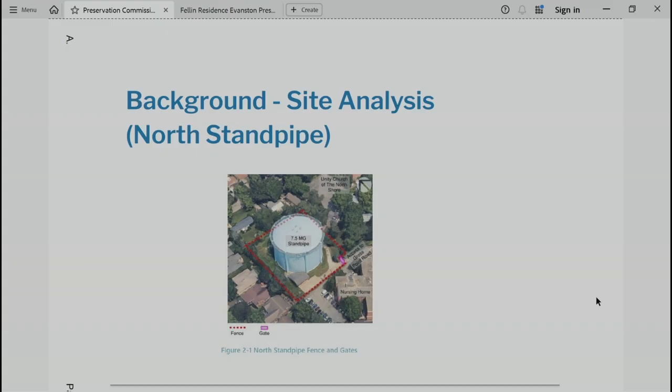We're going to replace it with something that looks like that, a palisade style fence. We're proposing some privacy slats along the top, on the north and west portions of the fence. So it will look like the picture on the right.

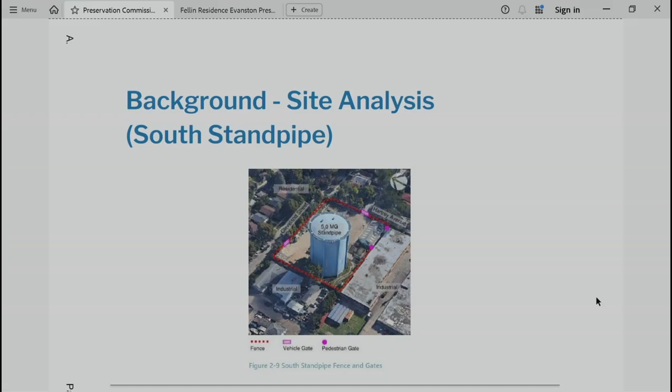This is the south standpipe location, around Cleveland and Hartrey on the south side of Evanston. It's a 5 million gallon standpipe, and we're doing the same thing there. That red dotted area, we'll be replacing the fencing and the gates at this location. This is what's there existing: a typical chain link fence with some privacy slats.

These are just a couple pictures of the gates, the west gate and the north gate. All of that is proposed to be replaced, again with the same palisade style fencing, and there will be some privacy slats on certain portions of the fence. This one here is more to block lights and dust.

We get complaints from the community around that area because we're in and out of that sometimes even 3 in the morning, all hours of the day and night. If there's a water main break or something, we have to access this location. So we're going to add that just to help with dust control and lights and things of that nature.

This is the water plant location, which I know is a landmark. The green fencing or green lines indicate where the fencing is being proposed and replaced. The section starts on Lincoln Street, goes towards Sheridan Road, and wraps around to the front of the water plant. That's the conceptual design we're proposing.

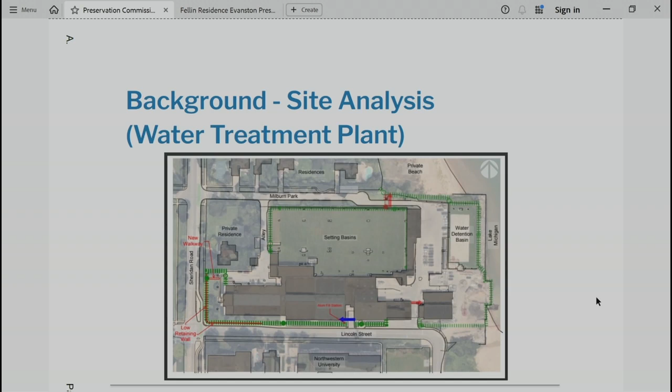Currently, there's no fencing there. The rest of the fencing shown is existing, and we're just replacing it. But that fencing along Lincoln going up towards Sheridan Road, that would be new.

This is the typical north fence. It has some privacy slats, chain link. The east fence facing the lake—currently at the top, that's the top of one of our settling basins. That's the existing palisade style fence, and it'll look similar to that.

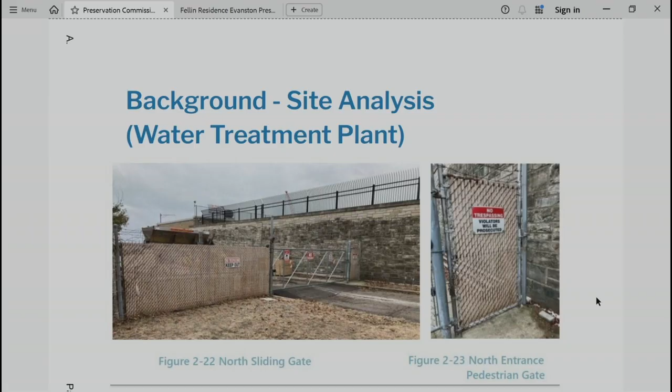We'll replace the gate there at the lower elevation, and the pedestrian gate will be replaced as well. Chain link with barbed wire is the existing condition. The south entrance along Lincoln Street, all of that's going to get replaced.

Again, palisade style fencing. So it'll be decorative, it'll look a lot better, and it'll be more secure. Certain parts of the fencing and gates will be impact resistant as well. I won't point that out specifically, but that'll be something designed and incorporated into this project, not just at the water plant, but at the other two locations as well.

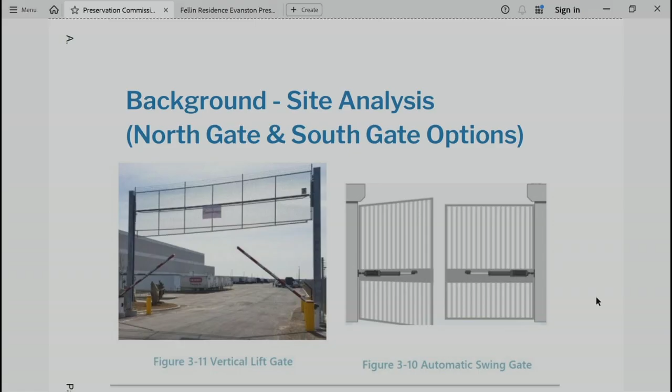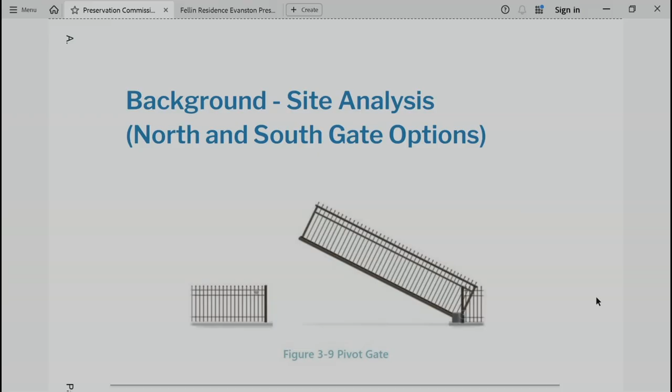And for the gates, we're looking at 3 different styles: a vertical lift gate, a swing gate and a pivot gate. Again, all of them will be decorative style just to enhance the appearance of that location.

The design was conceptual for 9 months, and that has been completed. We're looking at a total duration for design and construction of the fence of 21 months. We're currently at the 30% design stage. 60% is anticipated to be completed in February 2026, and the current contract end date is July 9th, 2027.

So we wanted to bring this while we were only at the 30% phase and get you all's opinions about it. Any questions?

Sorry, what's the height of the new fence versus the old fence? Is it comparable? The new fence at the water plant will be 8 feet, and at the north standpipe that will also be 8 feet. Right now we're looking at the south standpipe location to see if we can potentially get a variance to make

that one 10 to 12 feet to help with the dust as well as the lights in that area. So 8 feet is what it is today? The chain link is 8? The chain link is actually 7 feet. Okay, we're going to raise it up to 8 feet at the water plant and at the north standpipe.

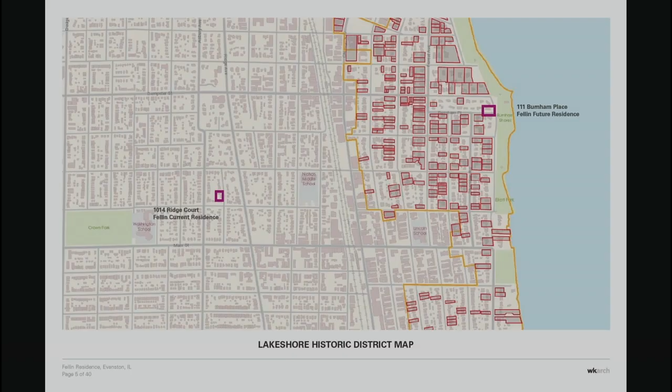So this is our reading of the Lakeshore district. We looked through that report. We've looked at every one of the contributing properties as well as the landmark properties. And on this map, we are also seeing where the Fellins currently live and the parcel that they have purchased.

Within the old Daniel Burnham parcel, we have looked through the standards, and I'll go through some of this more, particularly, Carl, for the criteria for demolition prior to getting into the design. But I think it would be important for us to walk you through the history of the parcel through Sanborn maps, and then to introduce some of the images that are recently found at the Art Institute.

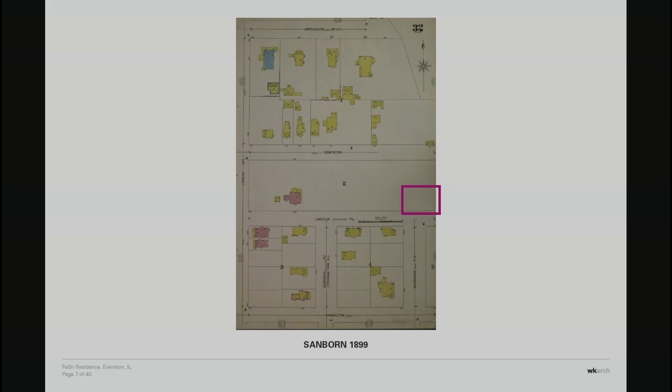So the Sanborn map of 1899 describes the site in that red square. There's nothing there. There's no wall there. And there is, to the left of that, the Burnham estate, which was the project, or the building, that Daniel Burnham bought, from our understanding. And they owned that entire parcel from Dempster down to what became Burnham Place.

So this is really the history. The bottom is 1899, so we could presume that there was a house to the left that was the Burnhams'. The Burnhams had that broad estate. And somewhere, in these drawings done prior to the information we will introduce tonight, a retaining wall bounded Burnham Place, the eastern facade, as well as the north along Devon, or Dempster.

That was presuming that there was going to be a relocation of a roadway, as we understand it, to Lake Michigan to the right. Lake Michigan ran directly up to this property prior to the infill of landscape and the subsequent park that took place.

So this wall is 2 foot thick, it's concrete, it's there, and we're not touching it. We want to retain it.

You will notice that the walls do extend further to the west than they currently do. And so that was done—they were clipped off and modified in the subsequent phase when they did the parcelization of the property. You will see that there is a dotted line on the upper level, which locates what is the Burnham room that was constructed.

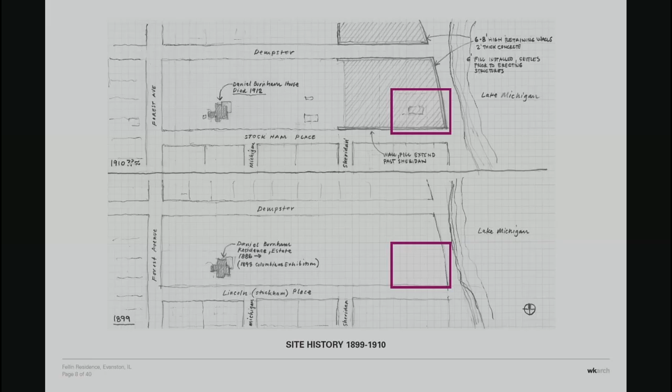That room was meant to be a shelter house. It was called a shelter house, but it was unimproved with any mechanical systems, plumbing, bathrooms, things like that. In the Sanborn maps, it calls it a cemented shed. It's a frame structure that was built on top of the fill that was added.

The Art Institute does have in their voluminous Burnham archive documents that document when the building was built. It was in 1909. These documents say that Daniel Burnham was the architect. Obviously, Burnham had a substantial office, so we don't know for sure whether he penned this, but obviously he directed it because it was part of his estate.

And they were signed by the builder, who was a mason, although it's ironic that there's no masonry on the house other than potentially the foundation. The house is frame and it's stuccoed. It has a plaster or stucco structure to it.

These are really pertinent. I don't think any architect would disagree that these are incredibly powerful images. And it does describe the location of the room to the east, which is the shelter room that was built. But I think it's noteworthy to say that when the building's retaining wall was built, the wall ran the entire breadth of the block. There was a stairway on the lower left that ascends up to that terrace, and that terrace spanned the entire breadth of the parcel.

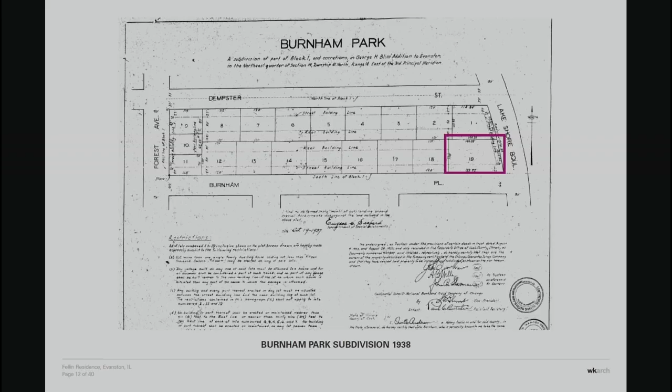One of the things about this building is that if you imagine it when first built, the view to the north, to the lake, and to the east was completely unobstructed. In the current condition, it's bounded by the demising wall, the fence, the house to the north, and it's now encumbered by the addition connected to that freestanding structure.

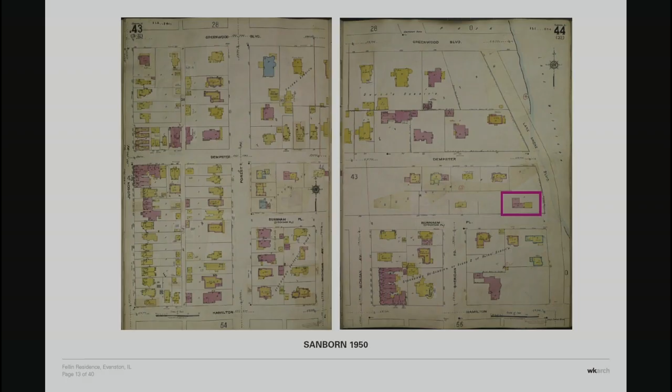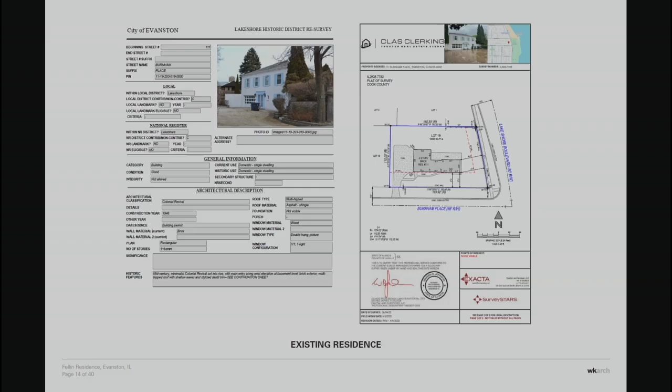This is the building as it is intact right now, with a two-story masonry building to the left, and then a link that goes to the 19 by 30 by 11 foot high room, which was the Burnham room. Note that the building was non-heated — there was no tempering, no utilities to it. The vents evident within the building, which we'll get to in a moment, are there for ventilation of the crawl space.

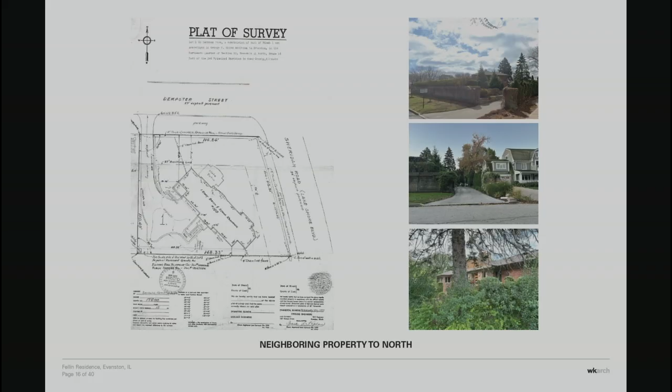This is the house directly to the north. Again, there were no rear yard setbacks at the time — there are now, and we are playing by the rules — but there were no rear yard setbacks, so the building to the north was able to rotate and face directly out to the lake, which is a benefit to that vista. But it also impedes the breadth of space between what was the broad view and vista from the shelter house, and now this building is creeping in on that.

These are some adjacent buildings, the contextual things that we studied, and we also looked at the contributing context within the district, so that there are noteworthy buildings of a different vocabulary than what is currently there.

As I noted, the existing retaining walls are being left intact. While the building might be pointed out, and I'm not diminishing the importance of telling a story, when you are on the public way, on the public sidewalks, the house itself, the Burnham Pavilion, is really not that evident. The thing that you really encounter is a retaining wall.

This is the condition of the existing building. The addition to the upper left, showing the one-car garage, which again, per this code, is still not allowed. There is masonry. It's a two-story building, and then it rises up, but then it steps back down to the existing

shelter house. Please note that not only was the roof clay tiles removed, but also all of the windows were removed. So there's no ventilation in the house, and hasn't been for probably 20 years, other than the doorways.

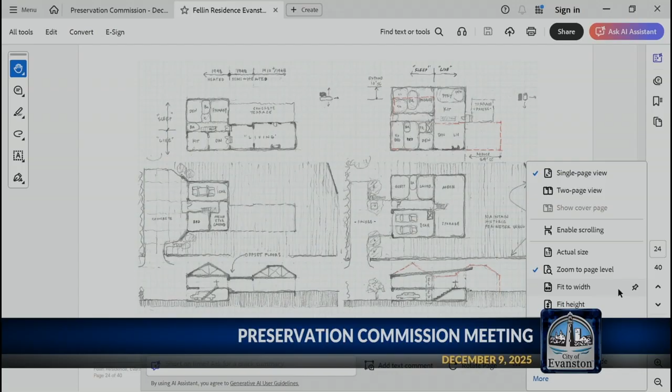So just a couple of technical comments. One, I just want to clarify for the record that the applicant stated the Burnham structure as a shelter, not a garage, just as a clarification. I don't think that's going to affect anyone's judgment on this. But the other comment I want to make is at our last meeting, we looked at whether or not we were going to landmark something, and there was this question of integrity. I believe it was actually the first question or the last question at either end of the standards we were looking at. And so when we're reviewing something and its appropriateness for demolition in these standards, I'm wondering where that question of integrity comes in.

So you're asking me? Yes. So the significance of a property is really a reflection of its ability to communicate that past and that significance, and that's what integrity is. Does it have sufficient physical integrity to communicate its past in a legible way? The one caveat, I think it's a great exercise for this commission to look at this through that lens and determine, does it communicate that past and that significance or not?

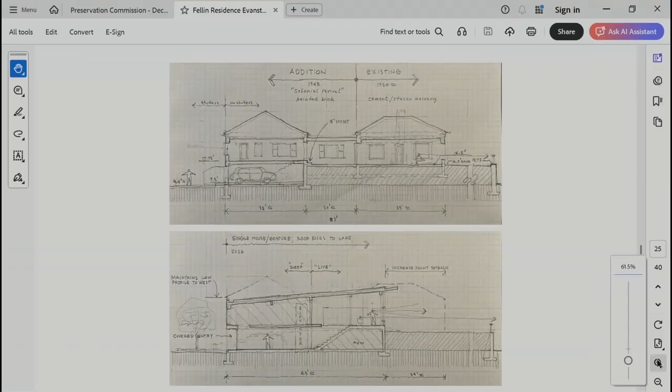These are comparisons in terms of the existing building on the upper portion, and then the intent we have to make a modest change. Is there a way to zoom in, because it's very hard to see? Or could we turn the lights off? That would be great—we appreciate everyone's patience. Okay, that's much better for everyone. Let's see, can you see, or if I'm standing here?

The upper portion shows the existing building with its modest construction and the 15-inch offset stepping down into where the shelter house was. In the proposal, we are trying to maintain or reduce its projection and prominence, working within the existing envelope of the roof lines, but also pulling the building further back from the west to minimize the impact of a new structure on the site. This is the history of the site. If we had known this information before, we would know there were stairs coming down here, an architectural slanted berm going down to grade, and these walls extending out. As you can see, the shelter house would have that grand vista to the north, to the east, and presumably to the west. And it sits right there.

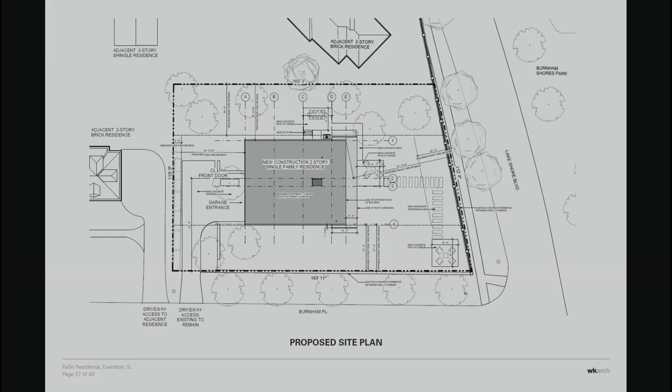In the 1938 document, there were no rear yard or side yard setbacks, and here we have maintained an increase of 30 feet. This is the footprint of the building—reducing the impervious pavement at this location, and cutting the building back. It's roughly 40 feet wide by the length of the building. These are the current setbacks. This is existing—this is the frontage of the existing building. So you can see the distance we're pulling the building back.

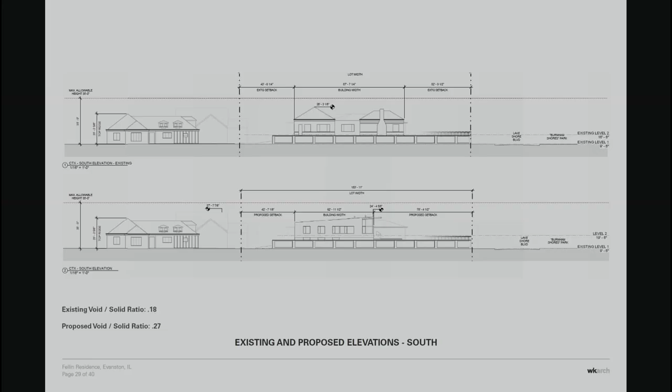Comparisons of the view from the east—I believe it's the east. No, I'm sorry, this is looking north. Yeah, this is both looking north. So this is the existing house, this is the proposed, and these documents are generated per Evanston's requirements, with no landscape or materiality being shown. This is the existing approach from Burnham Place, and then this is the reproduction.

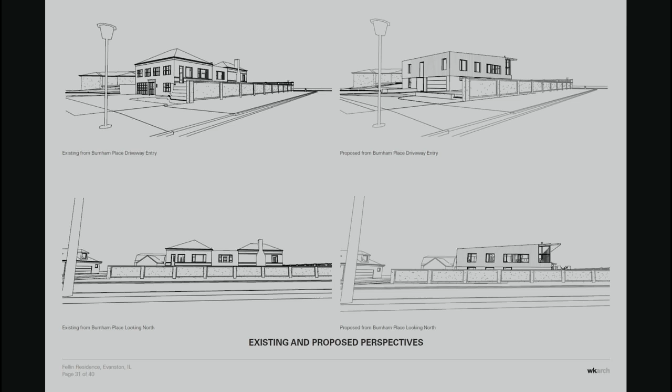And the intent is to have a single slope roof that drains back to the back.

We are looking at using CLT for the roof system, which is a sustainable way of not only structuring the building, but then also getting warmth from the interior. The exterior siding uses some things that are evident within the district in terms of wood siding, and then the exterior insulation or cladding for the concrete would be a cement panel.

And this is a drawing that really describes what the existing condition of the building is. It is literally at grade. There's a concrete apron that runs around the building right into the wood. There's no flashing evident between whatever foundation system is existing - a shallow crawl space, wood frame, and then a conventional wood truss up above.

This is asphaltic shingles. There are gutters that drop down to thimbles, so somehow the water gets out. This is a frame, and the vents that are existing are venting the space that's captured down here, because obviously when this building was built, there was no vapor retarders and so forth that would be typically mandated at the present time.

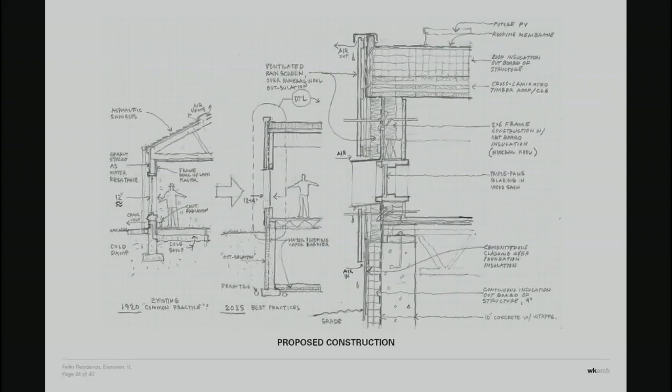So the building gestures to the lake, lifting it up, and the main public rooms are... so really the gesture is to face out to the lake. The public rooms are here, and then the sleeping rooms are to the west, whereas currently this is kind of the living room, the kitchen, the dining room, and the bedrooms.

This is kind of this quasi space - what do we do with it, because it is uninsulated, unheated, and it's actually 35 feet in width, not the 30 feet that was permitted, at least on the building permits. So they figured out some stuff there.

So anyway, this is the wood structure. The roofing would not be seen from the general public. There's an internal gutter so that all the water drains out.

And one of the things that we're doing is we're bringing the cars in as quickly as possible into the structure. We do have an elevator. This is important - this is problematic given the height of a car in the garage and structure above that.

And so it does mean that there's going to be a step of, let's say 16 inches, 2 feet, to get to that shelter house.

By doing a new build, this maintains a continuous roof surface. It has a stairway that is not arriving back here, but is actually arriving at the point of vista. And then there is an internal residential elevator to ascend up, so that all the floors are accessible by the Fellins.

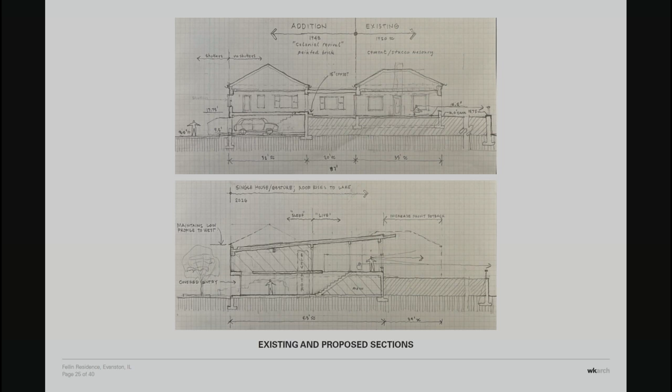So we're trying to be as most efficient energy-wise, use best practices, sustainable materials, triple glazed windows, and make a space that gives back a sizable terrace, which was the Burnham plan all at the beginning. But you can't solve every aspect, so that's the proposal.

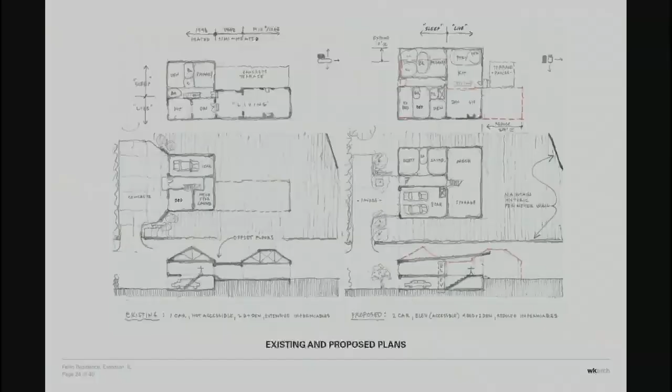So live up front, sleep in the back, 2-car garage, mechanical, and then a laundry down on the first floor. Landscape within this - currently this is a large concrete pad, nothing all that exciting with that. And currently, the cars go deeper, so there's a greater need for impervious paving.

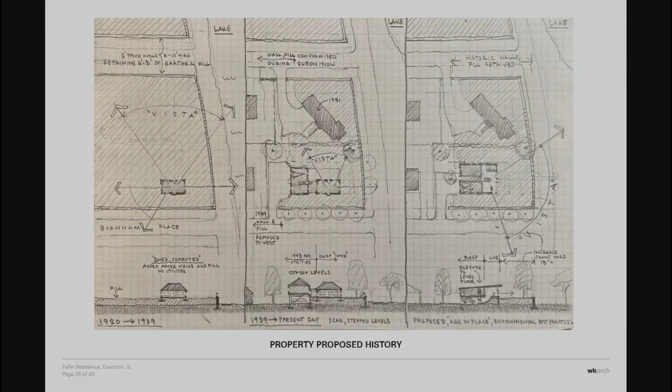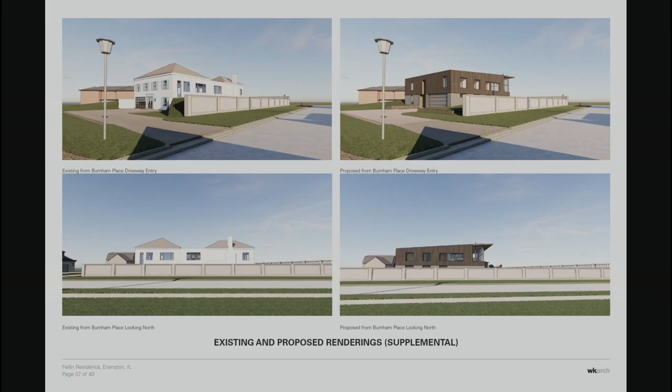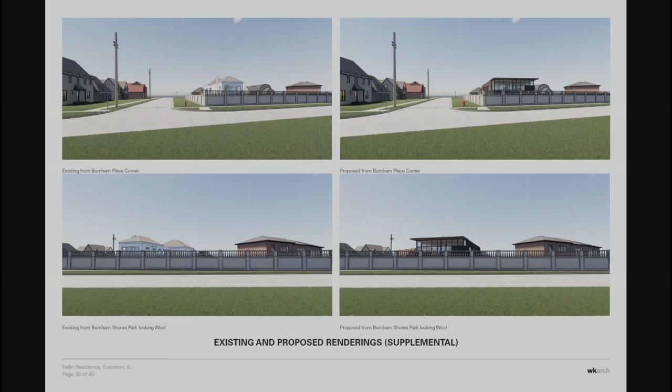These are the perspectives, and again, they're not necessarily dialed in, but the idea is a wood frame building, so it's not as bright and reflective as a white building would be. This is without any landscape, but obviously landscape is evident. And then these are the buildings - this is the expression of the driveway entryway, and then you ascend up and arrive within the public room and look out on the broad terrace.

So you mentioned landscape. I want to ask: was there a landscape architect that worked with Burnham, or did Burnham just do it himself? The wall, the terrace, and all that - was that his design idea? I couldn't say for sure whether it was O.C. Simonds or Olmsted. I can't say.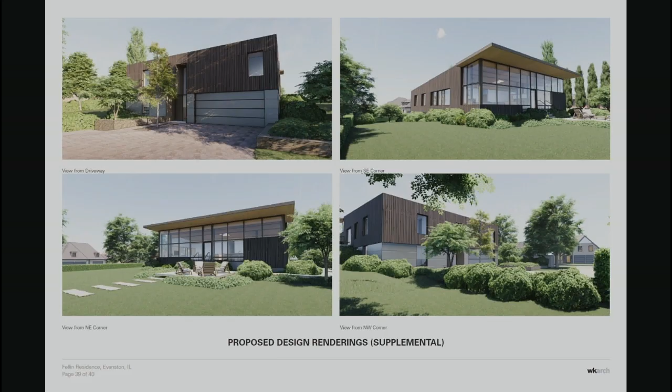But anyway, the photographs show that it is a terrace, a broad terrace, a building in it, and you walk through a beautiful wooded alley to arrive on that elevated terrace. Again, that would be spectacular. So there's no question that had real architectural significance, and our opinion is that the building itself is hampered. It's been hampered by a number of moves - the subdivision, the roofing, the removal, the addition of the building, and then the building to the north. All those things contribute, as well as the park. Originally the building looked out over the lake, and it no longer does.

I mean, a step back from there - well, all those things were very bad, but the next thing is going to be much worse.

I just want to go back to public comment - I think some of the neighbors wanted to ask about setback. So I think you addressed that, but I just wanted to make sure that we included that. Yes, thank you.

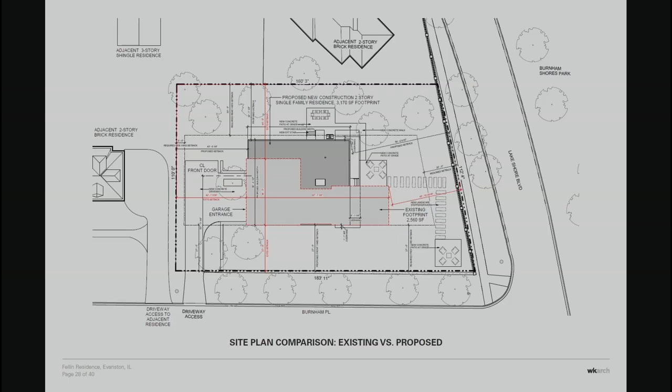Let's see, that was the tea houses, 1893? I'm just wondering - is this a replica of it? I think they provided a photo in the public comment. I would not say it's a replica of it. I can pull it up if you'd like.

And then the other question I have is, do we have any original drawings of the main estate home that was torn down? I'm not sure. I've worked on a lot of coach houses by famous architects, and there's always some detailing, and this has some really pretty detailing on the outside - although it's simple, it has some nice detailing. I'm just curious how close it is, whether it was his draftsman or him, was this an original concept building, or did he pull the details from his estate, and did he pull it from the tea house in the Columbian Exposition?

From what I can tell, what I've read about the property, Burnham purchased the house - it was already existing, and I think it was a 20-room house, so rather large. So this is pretty original all on its own. I think in Chris Hartzell's report she refers to the tea house at the fair and sees some references to that. It's on the left - yeah, that would be it. It does have a tile roof, yes.